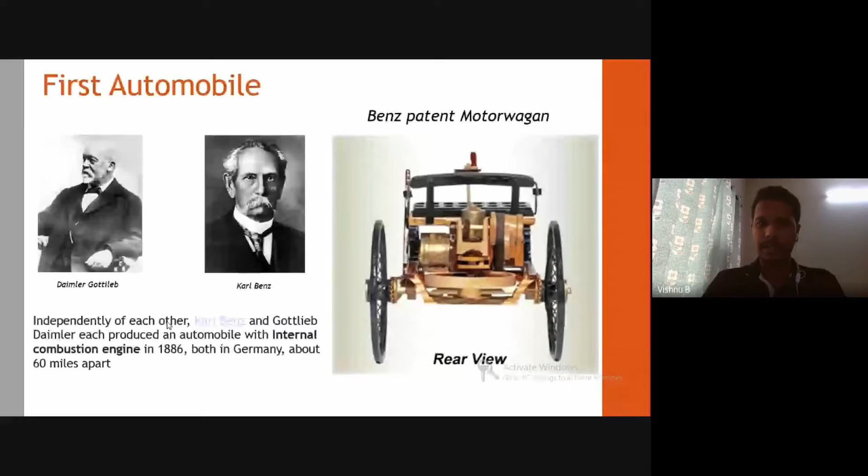But later, some 30 or 40 years after that, they both joined together - Carl Benz, Daimler, and Maybach. Everyone joined together and formed a group. Can anyone guess which group it was? It is still available right now - the group involving Carl Benz, Daimler, and Maybach.

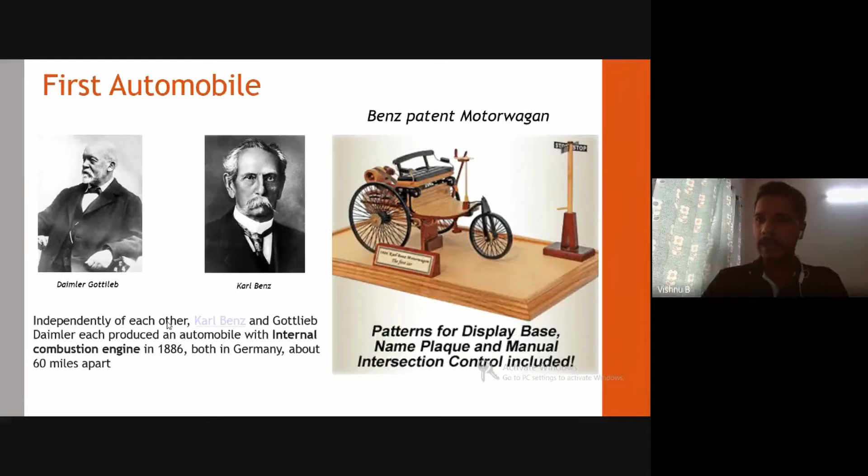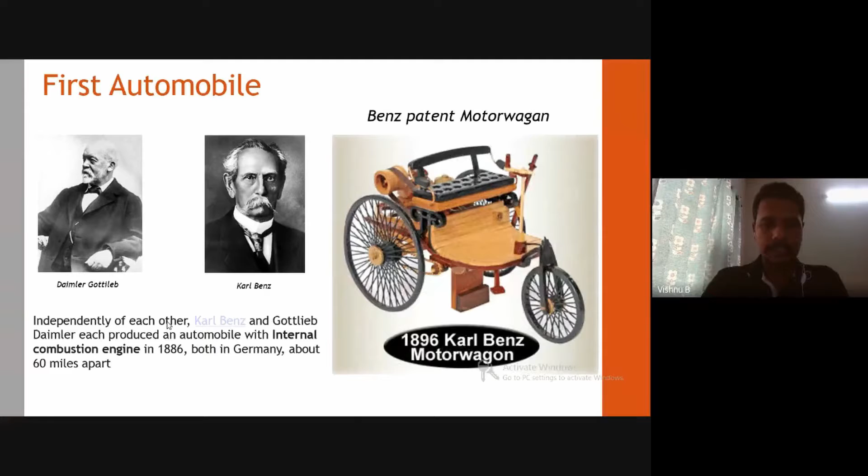Okay, as the name suggests, it is the Mercedes-Benz Group, which is also the Daimler Group. It involves Daimler, Mercedes-Benz, and Maybach. Maybach is a luxurious sports car developed by Mercedes-Benz. So these three combined and formed a group later on to take the industry to higher levels. Next slide, please.

So this was that three-wheeled vehicle which I was talking about, which Carl Benz invented. After Daimler invented the four-wheel version, Carl Benz also started developing a four-wheel vehicle, and it got a patent for that. Next slide, please.

As Alan Mark mentioned about Ford in his answer - yes, Mr. Henry Ford indeed did more revolutionary work in the automotive sector. He developed the first assembly line and started mass production of cars. Before that, whatever Carl Benz and Daimler produced was very low volume. But Ford made an assembly factory as it is now. The Ford Motor Company headquarters was in Detroit, and from there they operated and produced the Model T, which was one of the most successful and most mass-produced cars of its time.

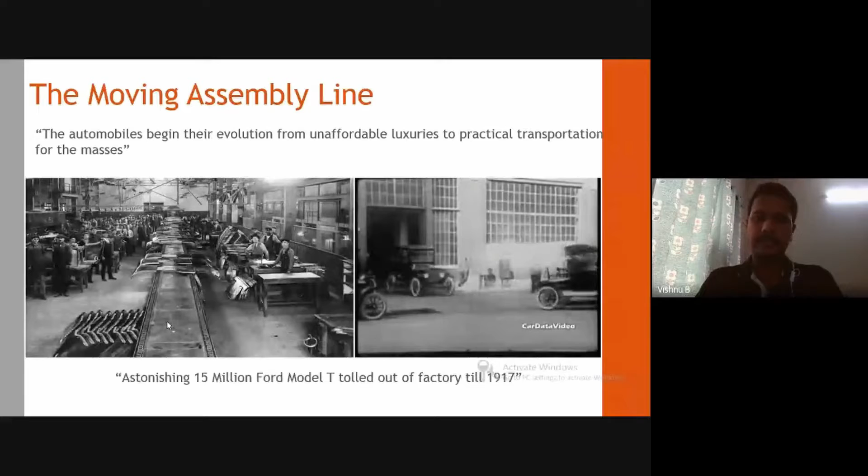Then as the production line further developed, it went from Germany to France, where we had Peugeot and others working on production line improvements. Then it went to the Japanese side. From the Japanese side, they were more focused on quality rather than production volume, and they developed many quality parameters.

As you all know, you might have studied lean manufacturing, Six Sigma technology, Kaizen technology. All of this was developed by Toyota in order to improve quality and minimize wastage. It's kind of a benchmark for industries even right now. This technology was developed in the mid 20th century, but even in 2020 or 2021 we are using the same technology in a much refurbished way.

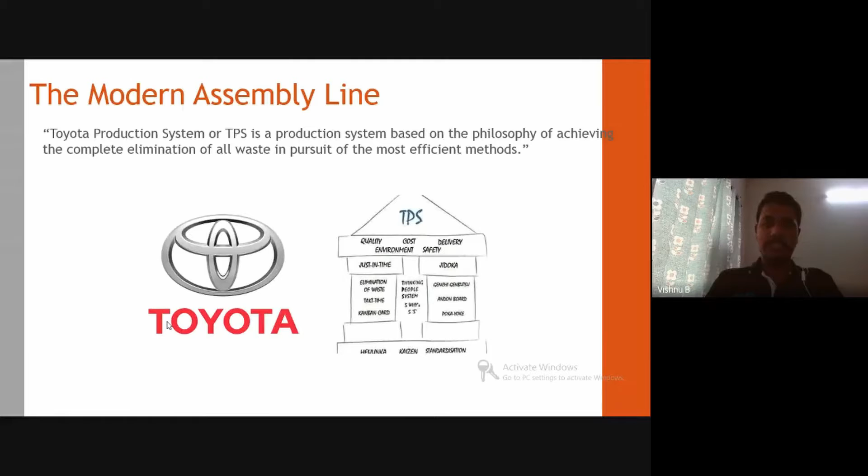So this was the journey of the automobile, how we started from a horse cart to the modern assembly line which we have right now, with all the quality parameters and production parameters. This is how we evolved to reach the present point.

Next, we will have a look at some of the breakthrough technologies. In every technology we have some breakthrough point, right? In case of transportation, for example, we were using the bike or car, then suddenly Ola and Uber came in - that was a breakthrough point in case of shared mobility. Similarly, in automobile technology, we will focus on some breakthrough technologies or innovations which led to the successful automobiles which we have now.

So first we will start with the material of construction. Initially, when Carl Benz, Daimler, or Mr. Ford introduced the automobile to the world, it was mostly in wood. Why wood? Because it was lightweight and easier to make available to the market, and easy to fabricate. We can cut wood into any shape - we don't have to do much machining. That was the reason they used more wood.

Then as it evolved, there was an introduction of steel, but not a fully steel body - it was a steel and wood mix. Mostly the wheels and the platform would be in wood, but the chassis or suspension would be in steel. Like this, it evolved, and as you know, now we are using fully developed steel - we are not using any other component anywhere.

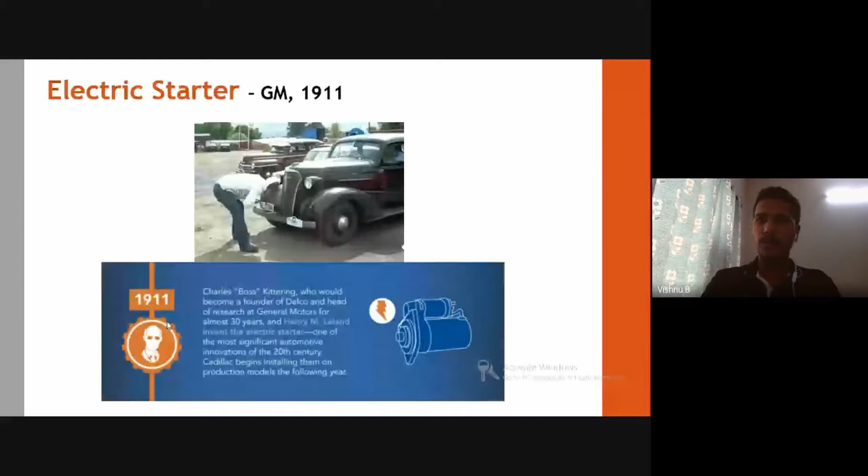This was one of the breakthrough, most innovative technologies in the automobile sector. Like you might have seen in some old movies, we used to crank it by hand. There will be a lever available, and that lever we connect to the crankshaft. In order to rotate the pulley, we rotate it with hand. I think it will take some 15 to 20 minutes to start a car. So it was very difficult till 1911.

In 1911, General Motors came with a very innovative technology called the electric starter. The electric starter motor uses electric current to start the engine. It uses the current from the battery, the 12-volt battery which is available in our car. As soon as we crank the key, it will take the power from the 12 volt battery and use it to start the engine. Once the engine is started, it will cut off the battery, and the whole power will be used from the engine. So this was one of the most breakthrough technologies used in automobile.

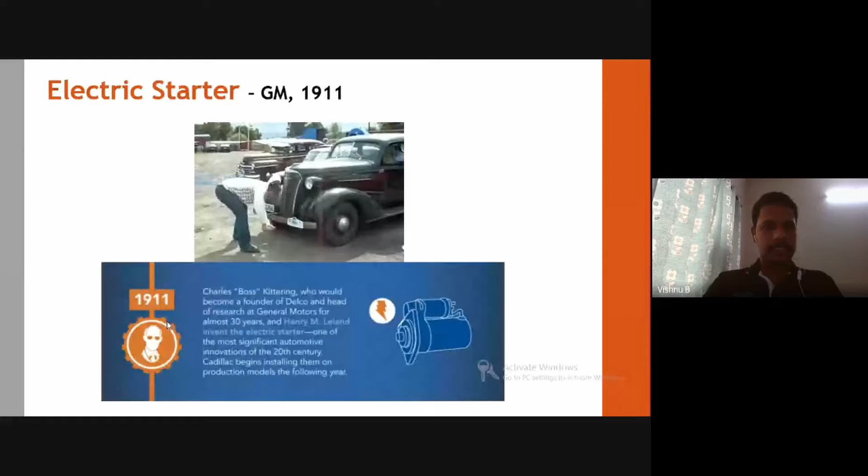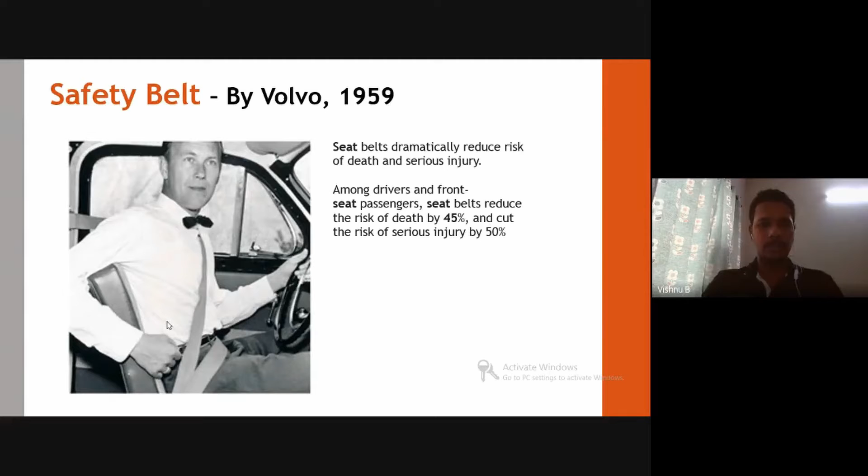As you know, I think everyone of you has this in a bike - everyone will have a disc brake in a bike.

Disc brakes were introduced around the 1920s, but they were not suitable for mass production because the disc brake material was not available.

Initially they used copper material, but copper won't last long - it heats up very quickly. So because of the road conditions at that point, it was not suitable for mass production.

It went through many changes and improvements, and finally the current scenario version was introduced in 1950.

In 1950 at Le Mans racing, it was first introduced by Porsche, with a round disc and a hole to dissipate the heat.

The material used at that time was stainless steel. Now there are many reinforced polymers available, and carbon steel has also been added. It has also been more enhanced, and a hydraulic system has also been added to it.

Before, it was brake shoe type technology. This revolutionized the braking system, because earlier we used a shoe brake where the friction was very low, and the shoe brake material also dissipated very easily.

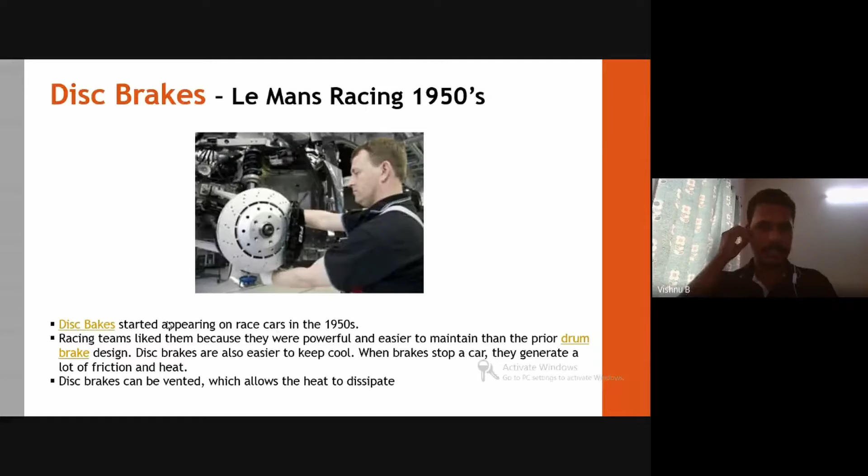I have also put notable rivalries in this presentation. I put that in here because there are many rivalries which enhanced the automobile sector.

These rivalries led to more innovation because of the competition. So I wanted to list out a few in this presentation.

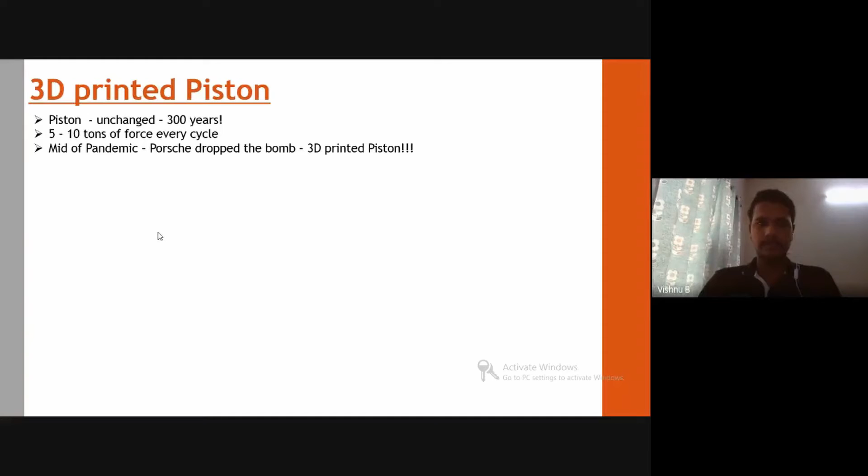Okay, so first we will have a look into the 3D printed piston. The reason I have put this is, as you all know, 3D printing technology is booming right now, so maybe after 10 or 15 years, we expect 3D technology to be far more superior than it is now. Can anyone tell me why we are going with 3D printing technology?

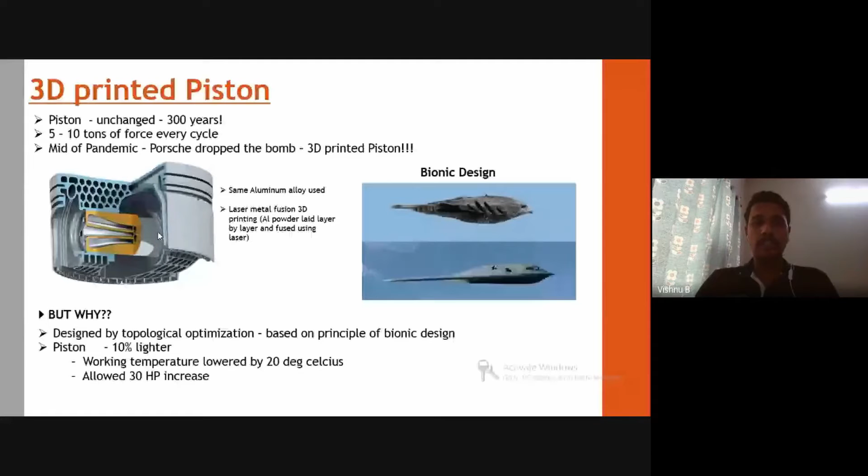I think everybody, as a mechanical student, might already know about aerodynamics, so I'm not going to explain aerodynamics itself. What I'm going to explain is a new design that came in aerodynamics.

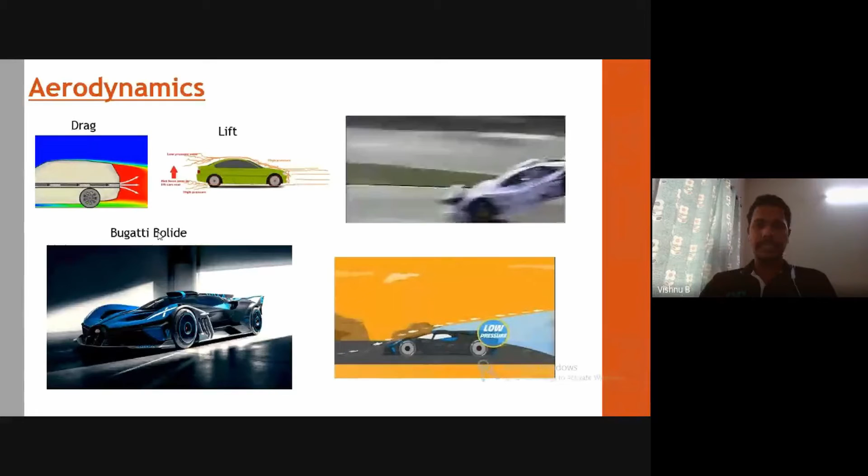This design was introduced in the Bugatti Bolide. In the next slide I will tell you more about the design. Next slide.

I think everybody has seen a golf ball, right? In the golf ball, there are many dimples available, small holes. Does anyone know why these holes were given in the golf ball? Why wasn't it a solid round ball? Any guess?

For grip, sir. For grip, okay. Any other? That was a good guess. Any other one? Anyone want to guess? For aerodynamic purpose. Okay, for aerodynamic purpose. Anyone else?

As you might have seen, the golf ball will go twice the distance compared to a solid plastic ball or solid rubber ball, or any ball available in the market. The trajectory of a golf ball will be twice or thrice that of a normal ball. Why this is possible, as mentioned, is because it is more aerodynamically made. The dimples provided in the golf ball create turbulence and make the drag force, or the drag air which comes opposite to the golf ball, slide and go in the opposite direction to enhance the trajectory of the golf ball.

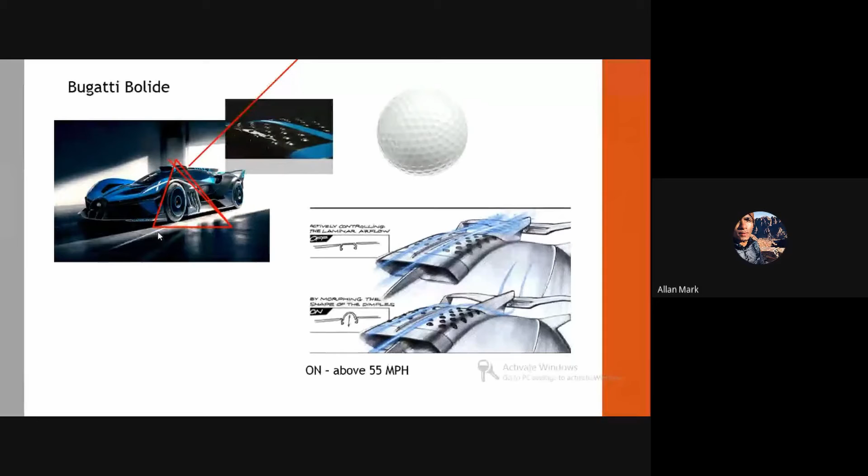I think they limit it to 400, sir, because they don't know the top speed they have not calculated because of the engine's power, I mean, so high.

Very good, Alan. Actually, the top speed, as Alan told, is 400, but theoretically that is not the top speed. In practical conditions, they have tested it up to 400 kilometer per hour, but theoretically it can go more than that. They don't know because there is no racing track facility or driving facility available for that.

This is also a sector where aerodynamic designing was already well established in the automobile industry. But if you see the current innovation in technology, someone just did a simple thing: he put a dimple on the roof panel where the air is flowing. So this kind of innovation is also coming, and it is a line where you can focus more.

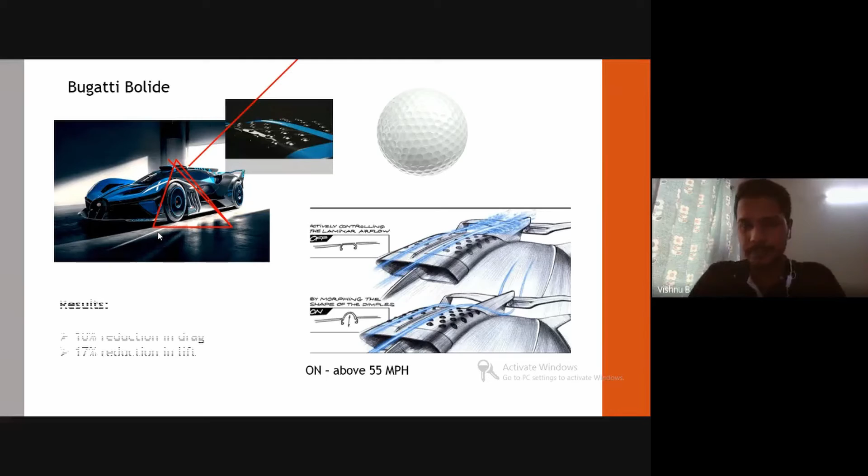Apart from this, mobility is a booming trend right now. If you have good knowledge in this sector, you will get a job very easily right now, because every company, not only automobile companies but every manufacturer, is focusing more on autonomous cars, connected cars, and electric vehicles. Shared mobility is already in a boom right now. So we'll focus on four points: connected cars, autonomous cars, shared mobility, and electric vehicles.

Next slide, please. So connected car uses AI technology, artificial intelligence. It is not only that cars are connected to each other and can communicate, but there are many types of communication: vehicle to vehicle communication, communication through internet, communication through mobile smartphone, or communication through any OS. So there are many kinds of communication happening right now.

At present technology, we have only smartphone connectivity to your automobile. If you own a car, you can connect it to the smartphone. Now, the next level is BlueLink technology we have introduced. BlueLink technology basically lets you operate some functions of the car with your smartphone, like AC on, engine on, door lock unlock, and you can also call if you want.

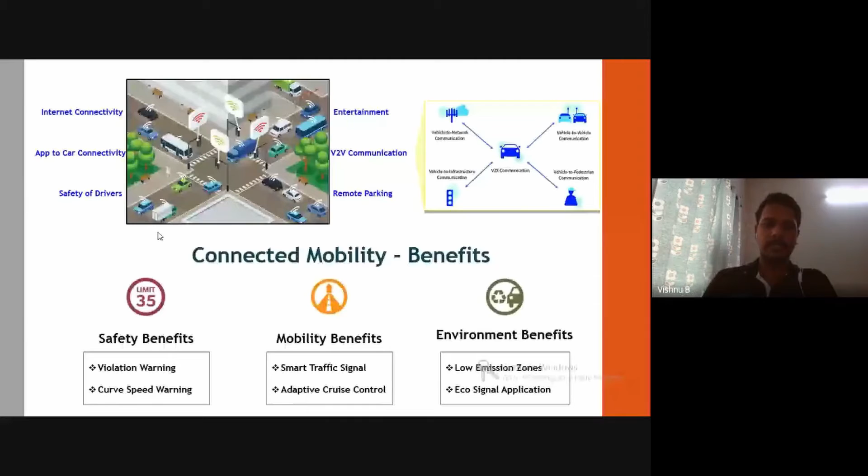Next we'll go to autonomous mobility. Autonomous mobility is basically a driverless car. What is the need for a driverless car? Because 94% of accidents happening right now are because of human error, and as people want someone to drive their car so they might be safer, putting a human driver again in the driving seat is not good. So we are going with driverless cars so that the person sitting in front can be safe.

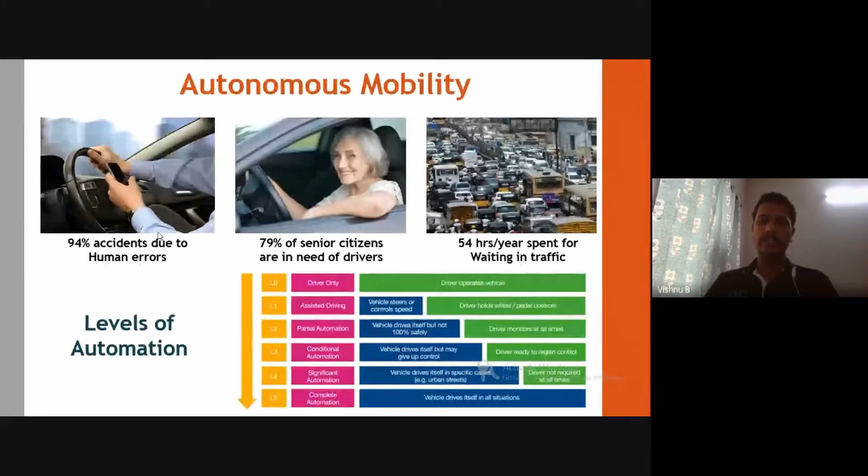As you know well, in India most of the time we spend in traffic is due to congestion, because we are not following the lane, we are going at variable speed, and moving from one lane to another very quickly. This can be avoided if we go with a driverless car.

For autonomous cars, there have already been many trials by top companies like Tesla, Google, even Ola has been trying it out right now. Honda is already developing it. So many companies are in the prototype stage, and it is yet to become a fully fit car that can be driven on the road because of many constraints.

Basically, it uses many sensors, radar, and cameras for its operation. It will calculate everything in the surroundings and let the car's ECU, the electronic control unit, know the distance to the next object, and where you have to take a turn or accelerate.

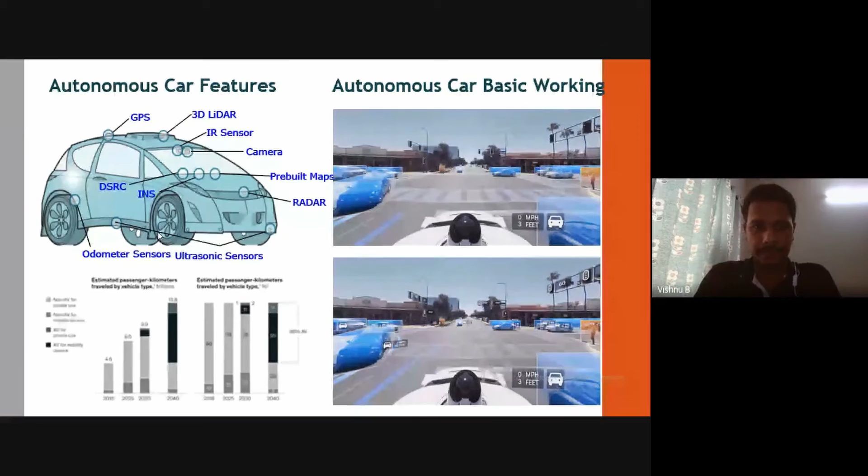So how does an AV, autonomous vehicle, improve mobility? As I told you before, accidents can be eliminated. It has more fuel economy because you don't have to always press the clutch and brake - it will calculate by itself and engage the gear, and it will reduce traffic congestion.

If all vehicles follow a lane-following system, there is no issue with traffic congestion. If one lane is congested, people can go into another lane very easily. It also provides real-time analysis of traffic and which road is easier to go with less traffic, saving travel time for everyone.

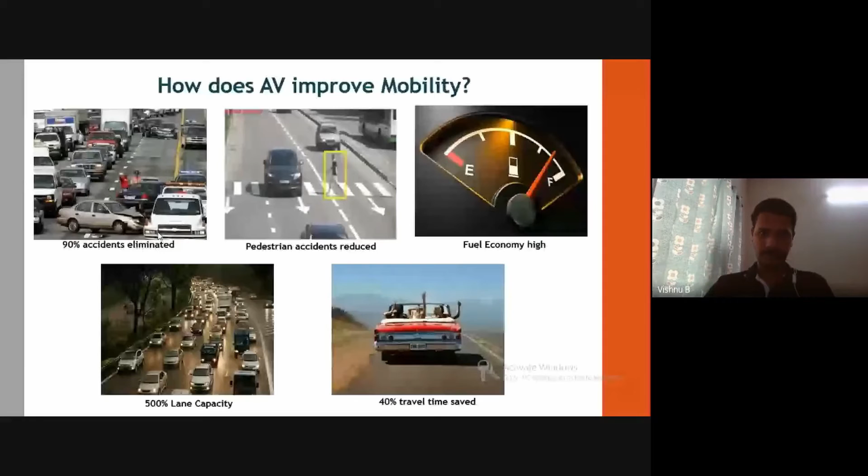Then we will talk about shared mobility. Shared mobility is like sharing your vehicle, or using a common platform to move from one place to another.

Basically, we require shared mobility to reduce congestion caused by too many vehicles on the road. Many countries have adopted schemes like one day petrol engines and another day diesel engines, or some have adopted one day even license number vehicles travel and another day odd number vehicles travel. But after so much effort, there is still a lot of traffic congestion and a lot of vehicles on the road, which is also adding to pollution.

So in order to reduce the number of vehicles on the road, we can always share the vehicle. Like you already know about Ola, BlaBlaCar or Zoom Car, many people are able to share this mobility. So this shared mobility segment is also booming right now, but it is more of a computer or electronics background than mechanical involved. It is more about networking and how you create the program. You have to develop yourself, but this is also a segment currently booming in the automobile sector.

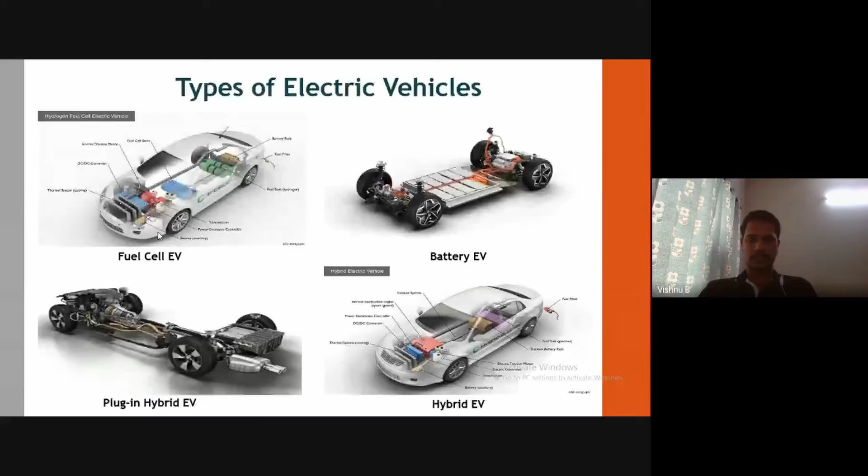But as it's some 10 years apart, we will have more stations where we could recharge it, and we will have more technology for that. Next slide.